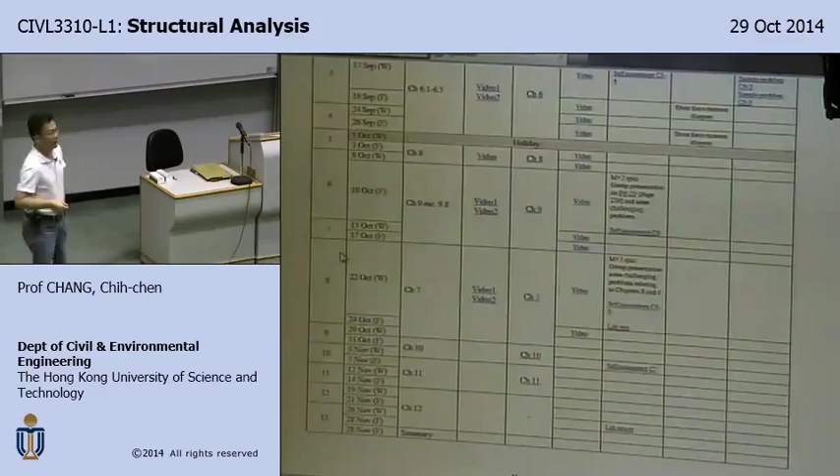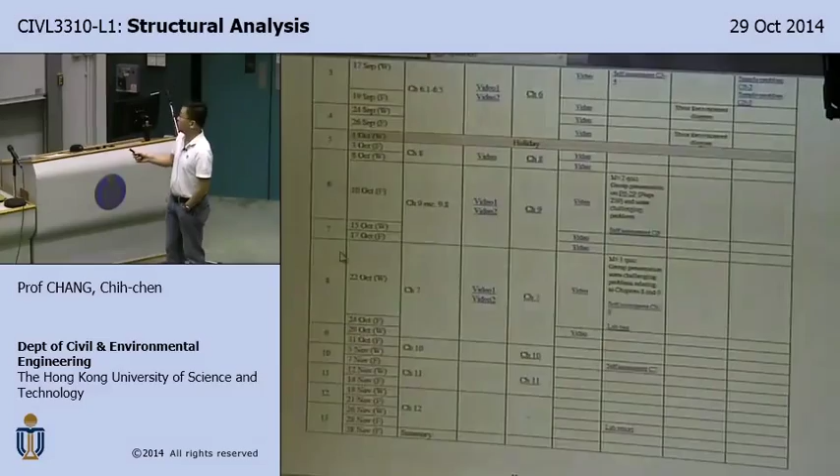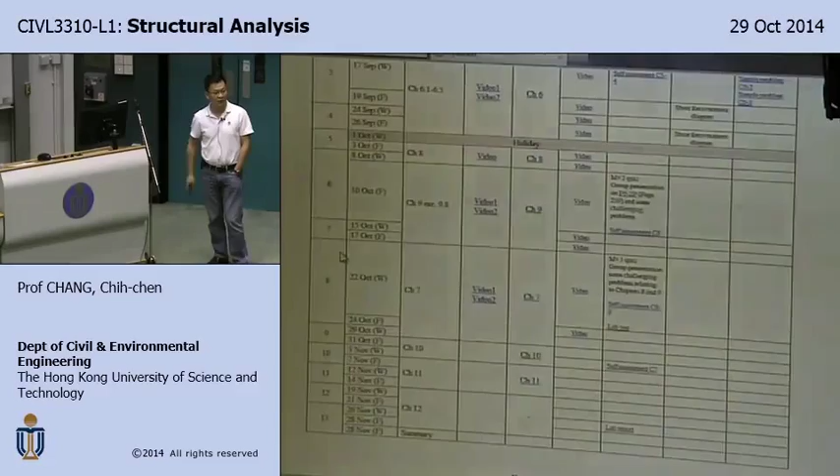Before I start, this is where we are. Today I'm going to finish Chapter 7. We're a bit behind. Also, later on I'll write mainly on the board today, so if you're sitting at the back row, you might want to move forward, otherwise you cannot see my handwriting. Today it's going to be very lengthy calculations and handwriting.

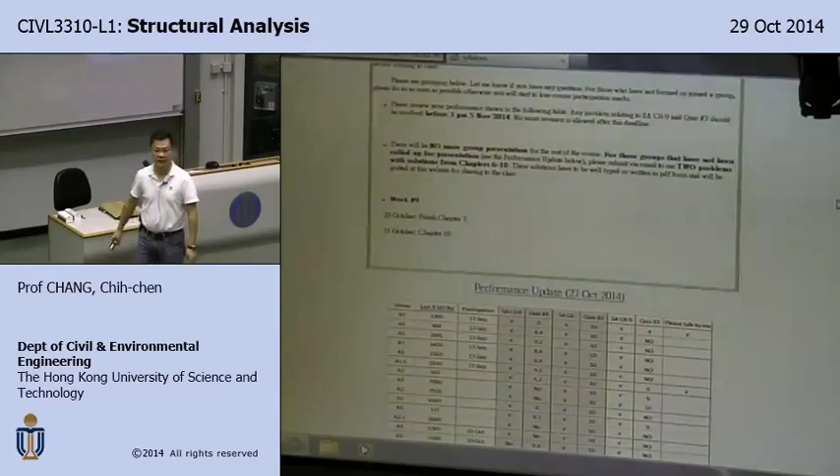With that, let me go back to the board to finish up Chapter 7. Don't forget, Chapter 7 we are talking about approximate solutions.

Approximate solutions - so you'll be expecting to see different answers even for the same problems. And most likely you won't be able to know the accuracy of the solutions you've obtained. So that's the downside of this chapter - we don't know exactly how accurate the solutions are that we've obtained.

But based on experience, it won't be too far apart from your true solutions. By that I mean anything between like 20-30% is kind of acceptable. You know, like in civil engineering design, we have a high safety factor - usually we throw in a safety factor of 2, 2.5, 2.2.

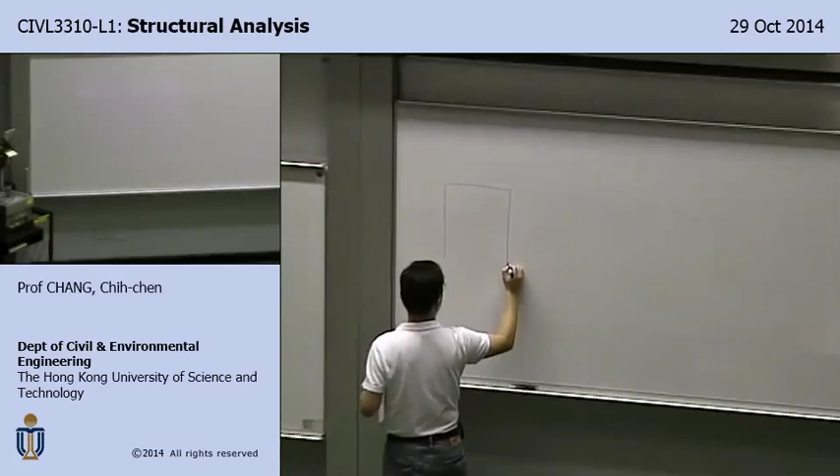So we are talking about two particular methods: one is portal methods, the other is cantilever methods. They start from assuming inflection points. Last time we talked about this particular example, and it so happens that just by using the inflection point assumption, it's already sufficient to give you the answer. So let me put down the solutions for you, and we start from there.

So this is a simple portal frame, 1 bay, 1 story, with horizontal force. Please be reminded, we treat horizontal force and vertical force differently. For horizontal force, we use inflection points, starting by putting an inflection point in the midspan of each component. For this particular example, we don't need any extra assumptions because this is a 3-degree indeterminate structure, so 3 inflection points will provide sufficient conditions already. So the results—last time I showed you how you can get them.

The result is I'm going to split this loading into 2 equally at the base, so it's P/2 shear force, and axial force up, and then bending moment at the base—equal bending moment, PH/4 and PH/4.

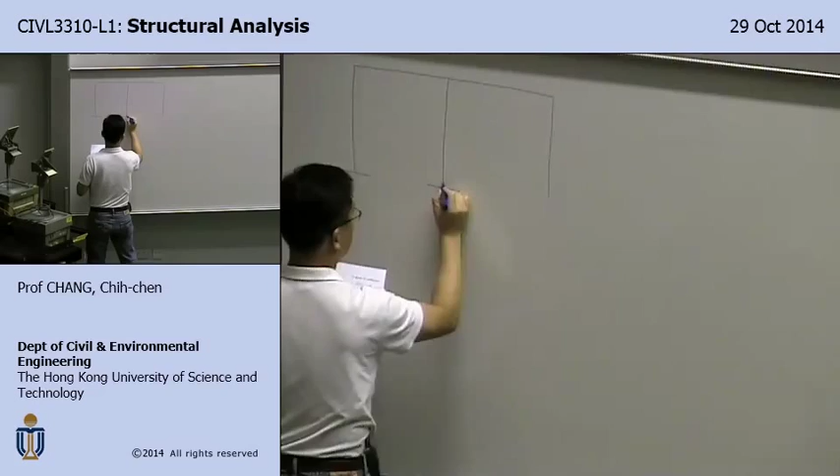Now let's try to take this and expand to a more complicated structure. So let's look at this one and understand what are the extra conditions and what are the Portal methods.

So this is a 2-bay, 1-story structure, assuming I have a P loading. I don't want to give you dimensions because this is only conceptual explanation. So look at the structure, and we identify that this is a 6-degree indeterminate structure—6 degree indeterminacy—so you need 6 conditions. Let's count: I throw in an inflection point at the midspan of each component, that gives me 1, 2, 3, 4, 5. So I'm missing one condition. If I have 6, then the structure will become determinate.

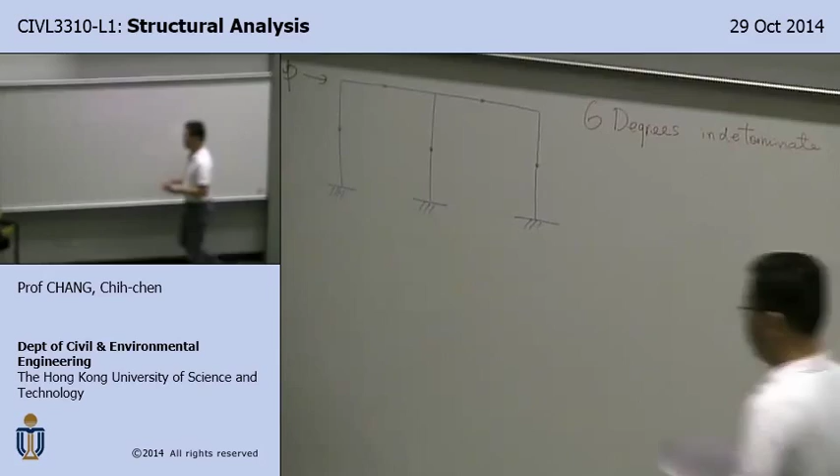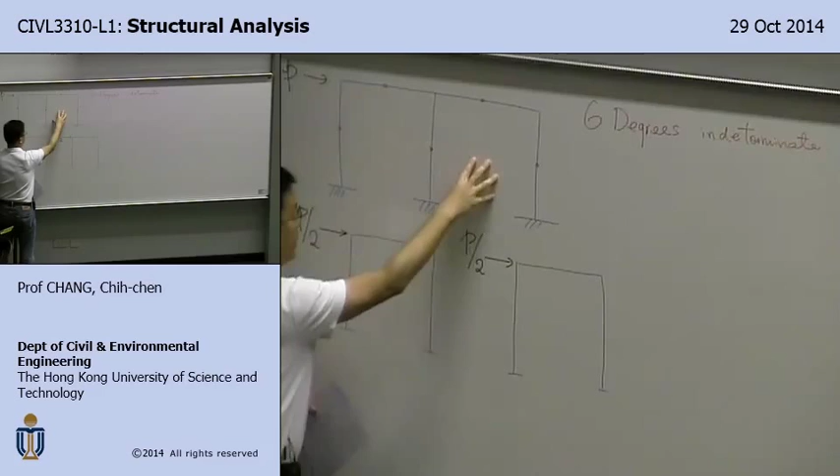So where do I come up with the 6th? Now, if you follow this approach: look, I have 2 bays, so I can just imagine that these 2 bays can be analyzed separately, like this. Each bay takes on equal load, which means this is P over 2, P over 2. So I'm assuming that these 2 bays take on equal resistance of horizontal force. This gives me one extra condition. Together with this assumption and the inflection point assumption, that gives me just enough conditions to analyze this further using equilibriums.

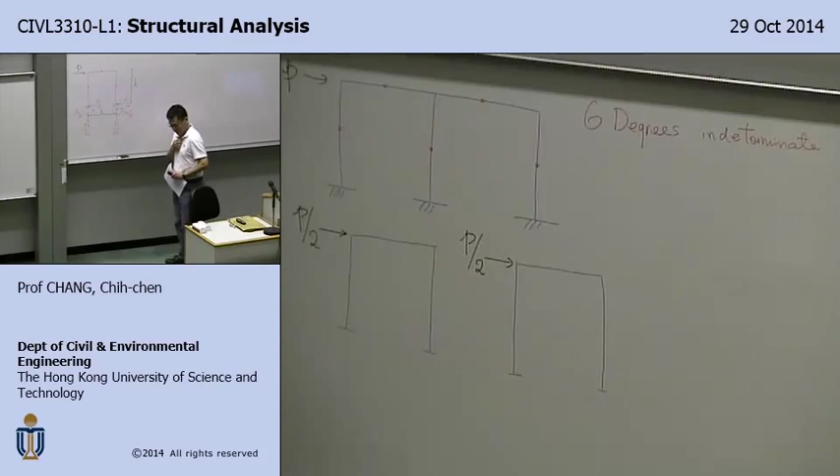So following the previous analysis results, this horizontal force acting on a single bay, 1 story, is going to split equally into the 2 columns—P over 4 on each column. Same thing here, P over 4 and P over 4. This is this column, and this is also this column. This is called the inner column, and these 2 are outer columns.

As a result, the Portal method, if you follow this path—this is called the Portal method—assumes that the inner column, the inside column, takes on 2 times the shear force, while the outer columns only take on 1 time the shear force. So if you follow that, that is called the Portal method.

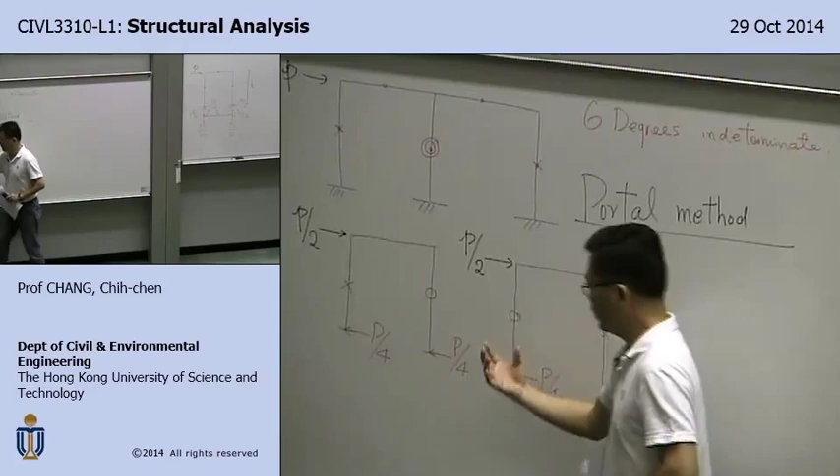So it assumes that each bay of your frame structure takes on equal horizontal force. And the consequence of that is the inner columns will have twice the amount of shear force compared to the outer columns.

Okay, so that works for shorter buildings. Now for taller buildings, this kind of assumption doesn't work too well. So people developed another method called the cantilever method, which assumes some sort of axial force distribution. We'll discuss that after we finish this portal method example.

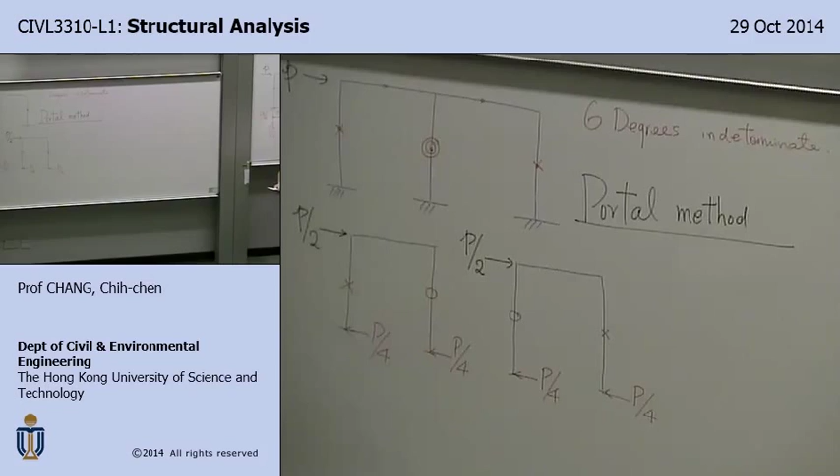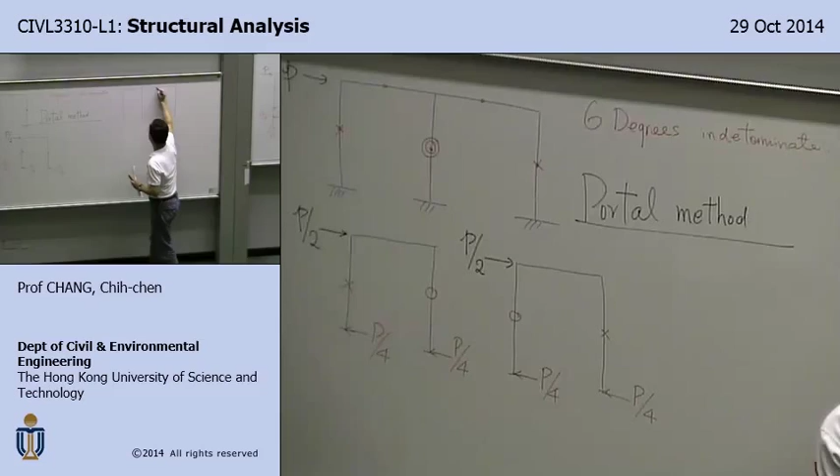All right, so with that, then you will understand why portal methods work. For instance, if I have 3 bays, a 3-bay frame under horizontal force, the shear force here is 1 time, the inner is 2 times the shear force, and the outer is 1 time the shear force.

So basically, there will be 2 additional assumptions involved in producing these results. The assumption goes like this: you split into 3 bays, so each bay resists P1, P2, and P3 force. Together they add up equal to P. So the portal method assumes that P1 equals P2, and P1 also equals P3.

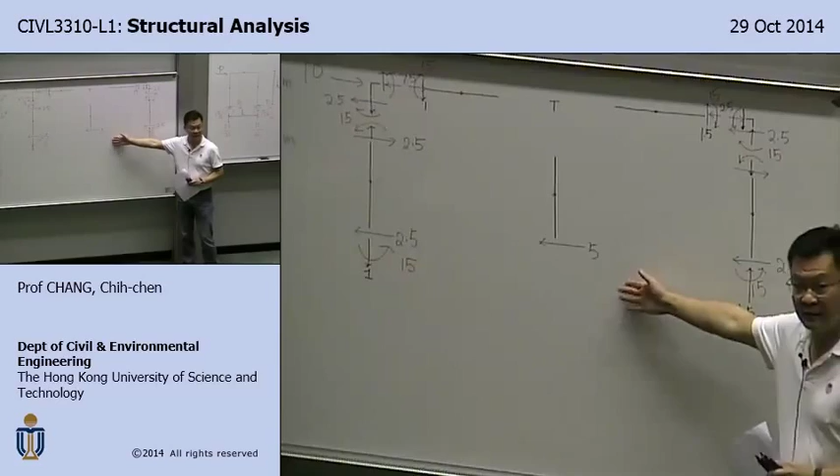Now let's try to resolve the mid part. Okay, everything is about equilibrium, right? Nothing fancy, I just do equilibriums. So look at this component, equilibriums 1, action reactions 1.

Moment equilibriums, action reactions 15. Axial force equilibriums, action reaction 2.5. Good.

Come over to this. Equilibriums 1, action reactions 1. And moment equilibriums, 15.

Axial force, action reactions 2.5. All right, done. The only part is the lower part now.

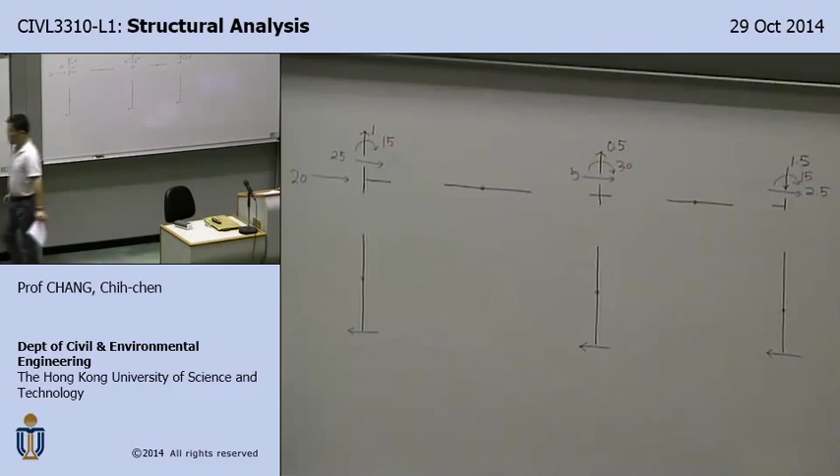So we start from the shear force: 1 time, 2 time, and 1 time. So shear force is here. One time, 2 time, 1 time. So the horizontal force, total horizontal force is 10 plus 20, so 30. 30 split into 1 time, 2 time, 1 time. So it will be equal to 7.5. 15 and 7.5. Okay, we start from there. 7.5, 15, 7.5.

Or you can also look at it this way. There's a 10 and 20, and then you cut a free body diagram at the bottom of the column. 1 time, 2 time, 1 time, to compensate total of 30, so this will be 7.5, 15, 7.5. Good? Are we good? You want to do it for me? Yeah, you're okay.

All right, so let's go. The height, half of 16 is 8. 7.5 times 8. 60.

Oh, I should work out the shear force first. Equilibriums, action reactions. This is 7.5. So 22.5 minus 7.5, so there should be 15. Action reactions, 15.

So I'm working on the blue first. Now work on the red. Here, moment equilibriums. There, moment equilibriums. Action reactions, 60. And then work at this joint, 60, 15. So 75 action reactions, 75.

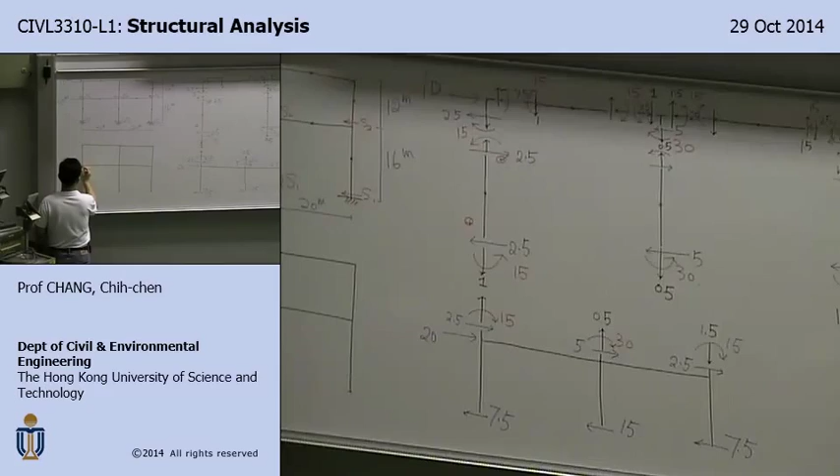So 15, 15. There's an inflection point in the middle. Look at this. This is tensile, and this is tensile, 30, 30. Inflection point in the middle.

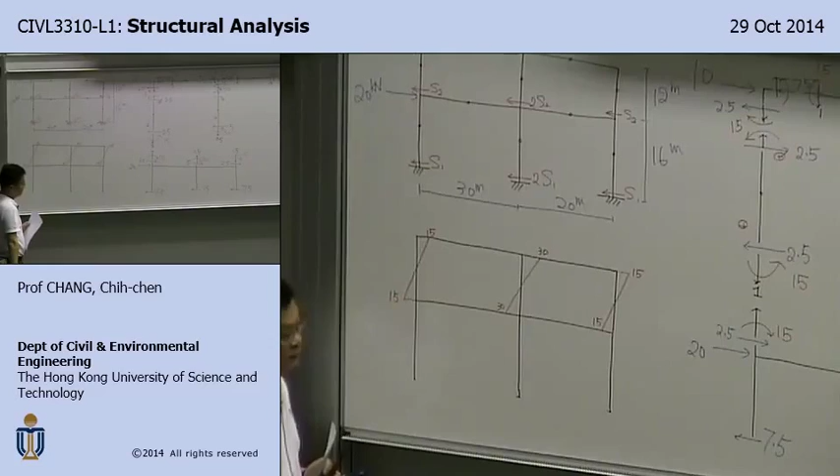And this one, tensile side, 15. All right, that's tensile side moment distributions. Look at the top.

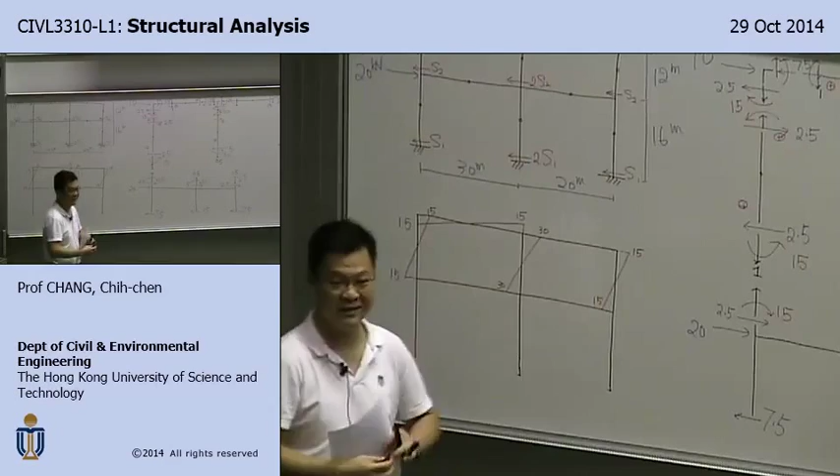So this is the tensile side. Here is a tensile side. So 15, 15. I'm writing a smaller and smaller font size, it's too complicated. So tensile side, 15, 15.

Okay, that's the top. Next is the bottom. So again, tensile, tensile, tensile. All right, got it. So column there, 60, 60.

And then 120. So, 120, 60 again.

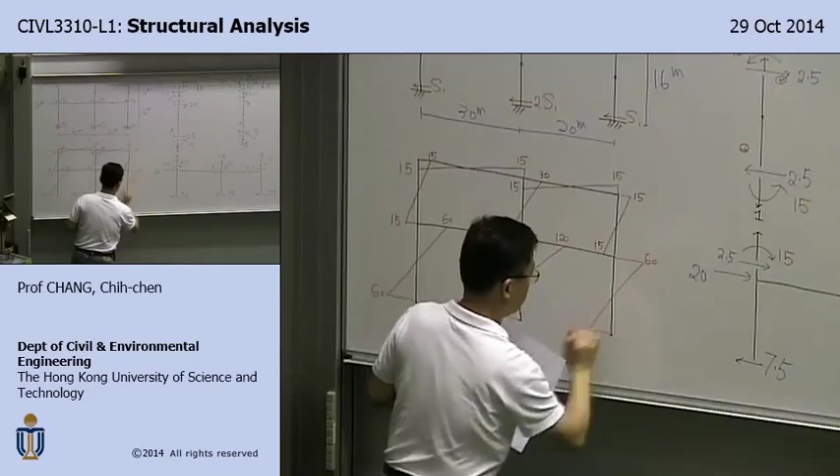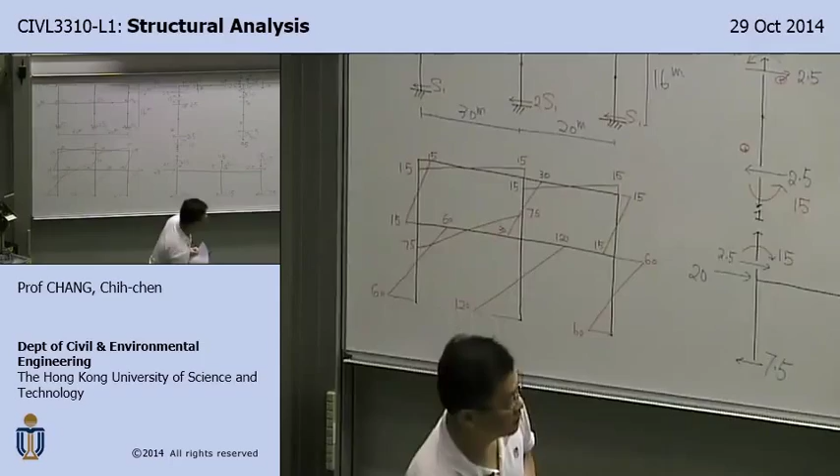Okay, that's column, and then I have beams. Beams will be 75, 75. Seven five, 75. Okay, done. This is the moment distributions plotted at the tensile sides.

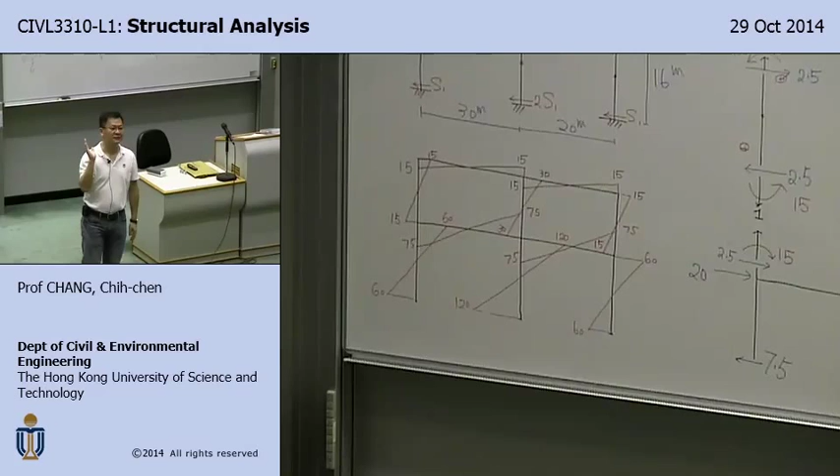Let me just remind you again that these are approximate solutions. And as you can see, if I work this out using cantilever method, the solution is going to be different. And the differences are not small. So please be reminded that this is the price that you have to pay.

Basically, this is an indeterminate structure, so we are trying to analyze this using determinate means. That's why you end up with a conclusion like this. And as I say that, I won't be surprised to see the difference ranging between 20, 30, even 40% between the two sets of solutions.

OK, so that's the portal method. Next, I'm going to go very quickly on the cantilever method. I'm going to use the same example, but using the cantilever approach.

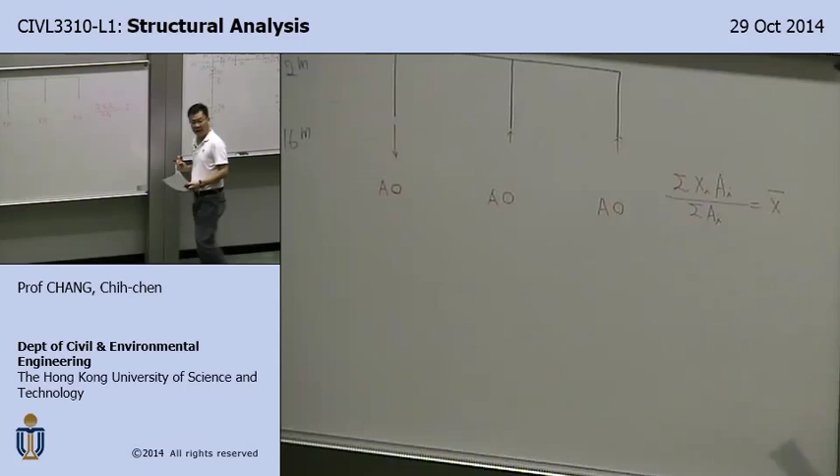In statics, we have centroid calculations. Remember that? Summation xi ai over summation ai gives you the average location. That average location refers to the centroid location.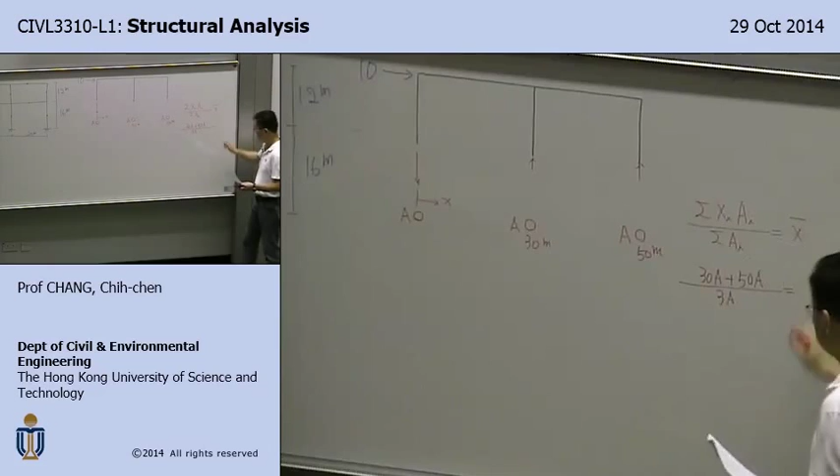So you set up a coordinate system here, called x. This area is located at 30 meters, and this is located at 50 meters. So summation xi ai is 0 times a, 30 times a, 50 times a, divided by 3a. That gives you the number 26.67. So it's telling you that you have a centroid at this location, which is 26.67 meters away from the origin of x.

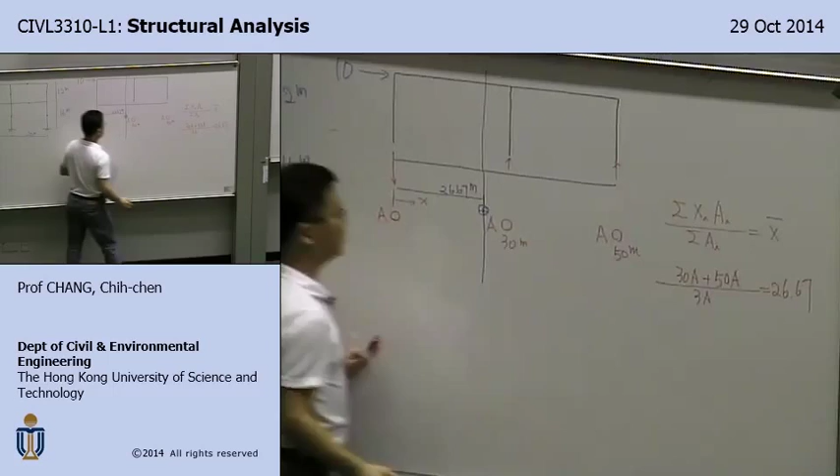For the cantilever method, it assumes that the axial force is linearly distributed with respect to the centroid. Here's the centroid location, and it assumes that the magnitude of the axial force follows a linear distribution. So this force, that force, and that force are linear with respect to the centroid.

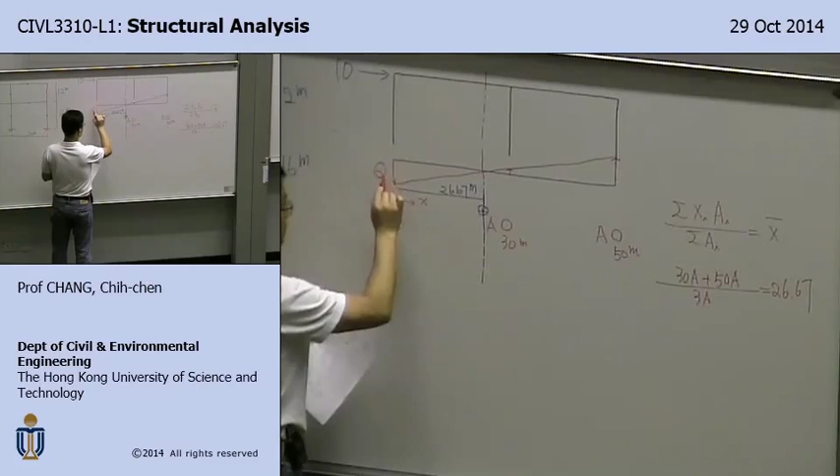If I assume this force is Q, because I know the geometry and the locations, I know this is going to be 0.125 Q upward, and this is going to be 0.875 Q.

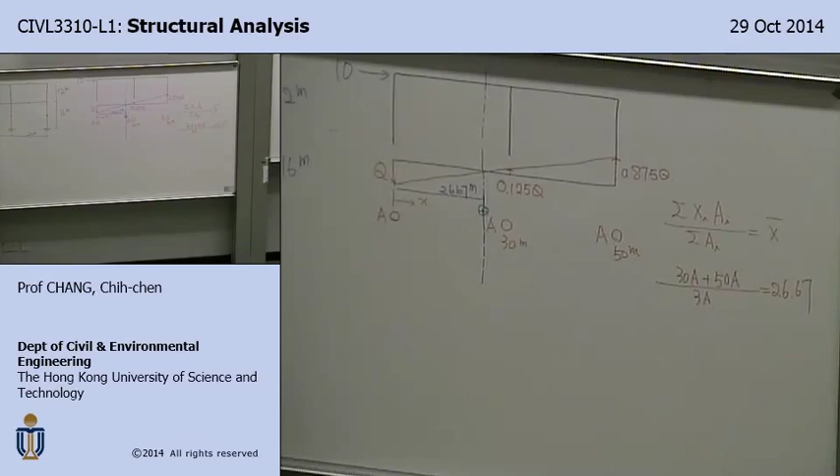So I'm just explaining the assumptions adopted by the cantilever method. Instead of saying that shear force follows some distribution, it assumes that the axial force follows this linear distribution with respect to the centroid of the cross sections of the columns. That's the tricky part. But it turns out this method works better on tall buildings. If you want to analyze like a 100-story frame, most likely you need to use this method, which is more accurate than the Portal method.

All right, so if you understand that, then this is what we can do. We can crack the structure from here. So let's cut it over there.

Here is a 10 kilonewton force. The axial force follows these distributions: this is Q, 0.125 Q, 0.875 Q. Of course there's an axial force, there's a shear force, no bending moments. This is the hinge location, the inflection point location, so there will be no bending moments, but there will be shear force and axial force.

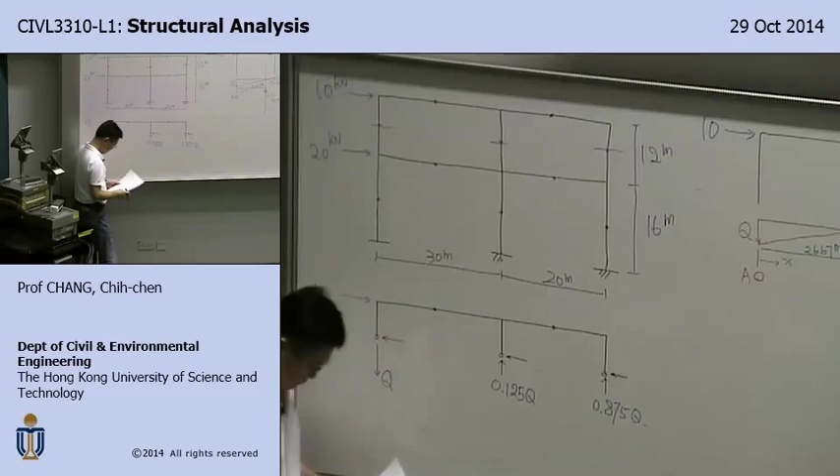What you can do is come over here, or come over there, it doesn't matter. Just take moment equilibrium. You come over here, take moment equilibrium, and you find out the only unknown is Q. Moment equilibrium, summation M, that will give you the Q value.

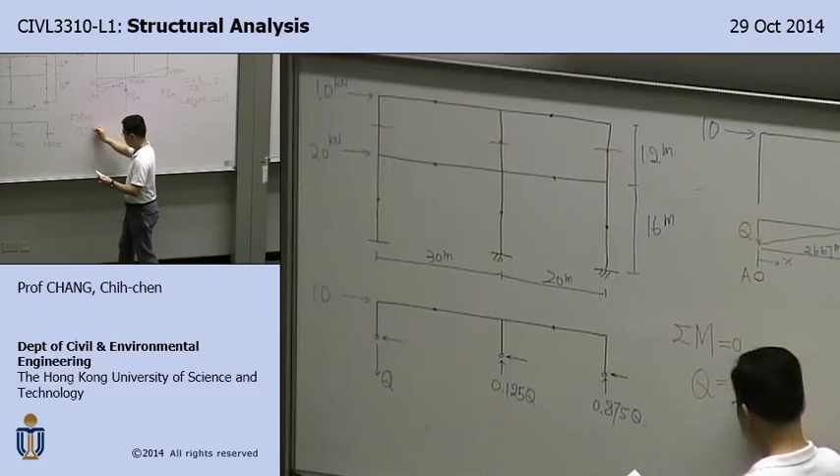Remember that you have to do it at the inflection point where you don't have bending moment. You cannot do it here because there will be bending moments. So you can only do it here, here, here.

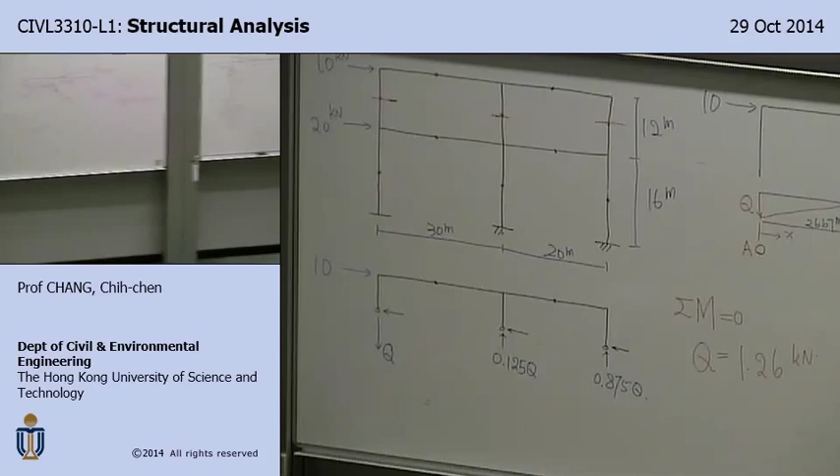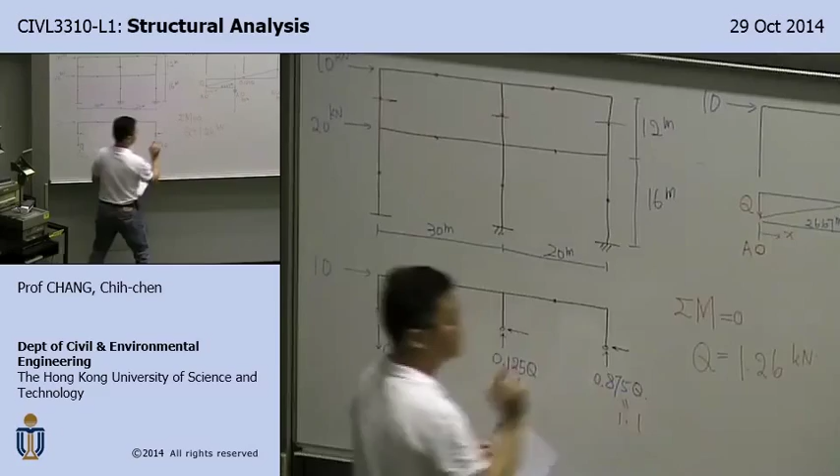All right, so with that, then your solutions can start. This then is 1.26. This is 0.16, 1.1. All right, so then we can start our solutions.

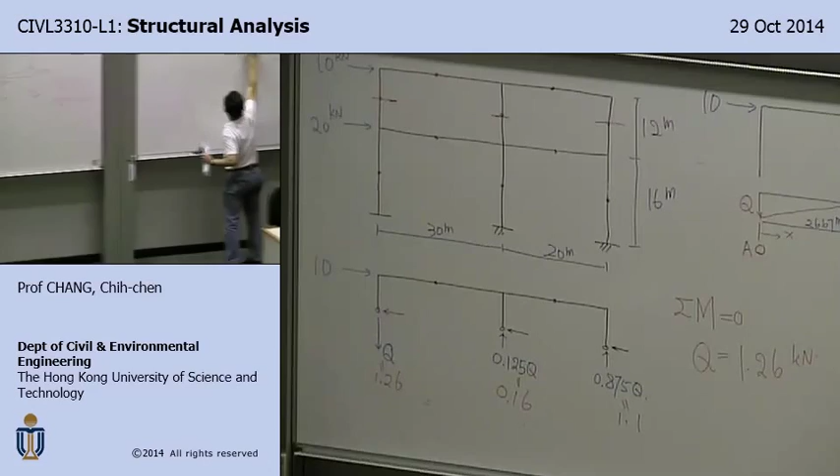We'll do it quick. The calculations after you get the axial force are very similar to the Portal method.

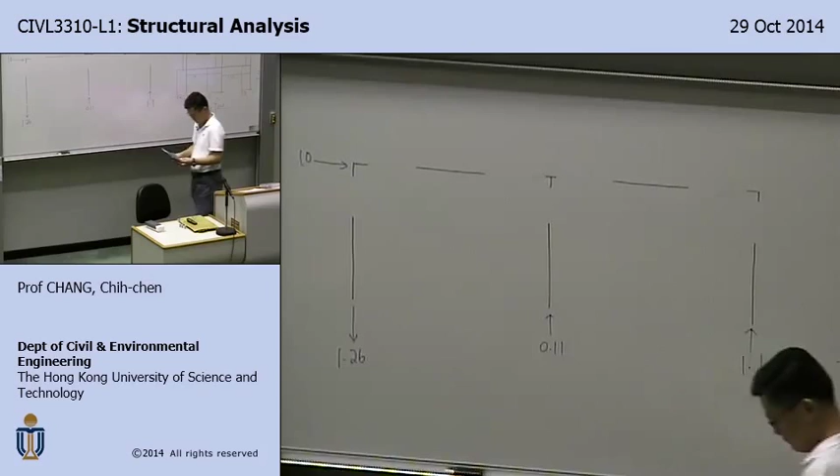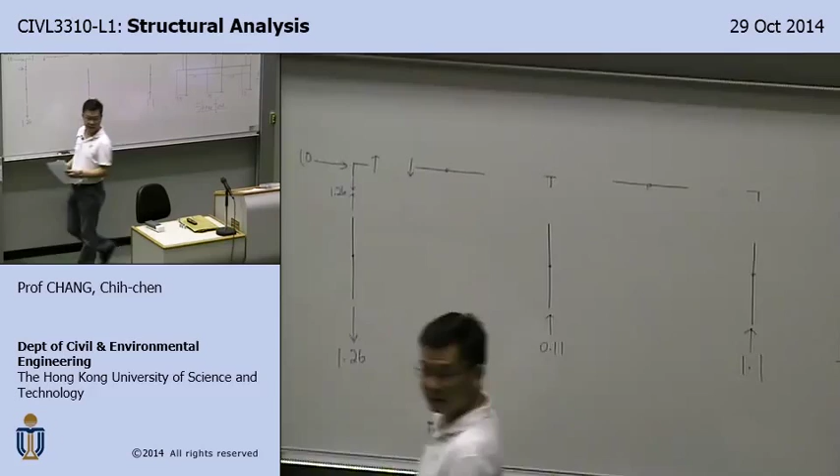You want to see the magic again? Let me show you just one third of it. Let's put down the inflection point. Trust me, right? Follow the color: 1.26, 1.26, 1.26, 1.26, 1.26. You see? One number leads all the way there. So that's 1.26.

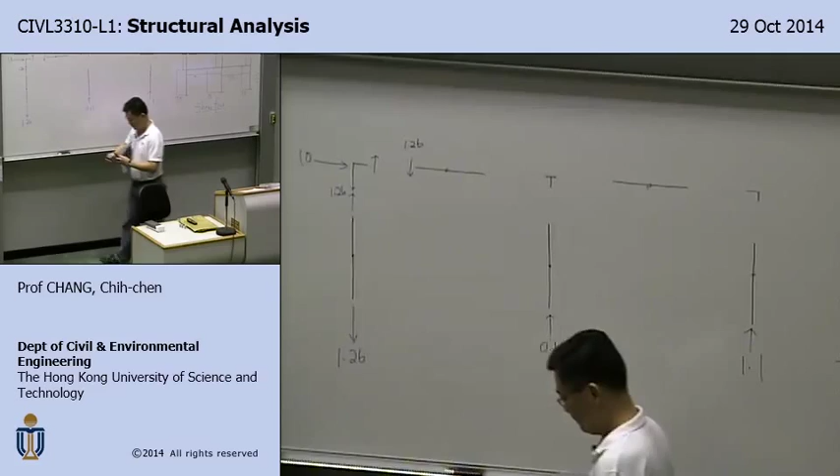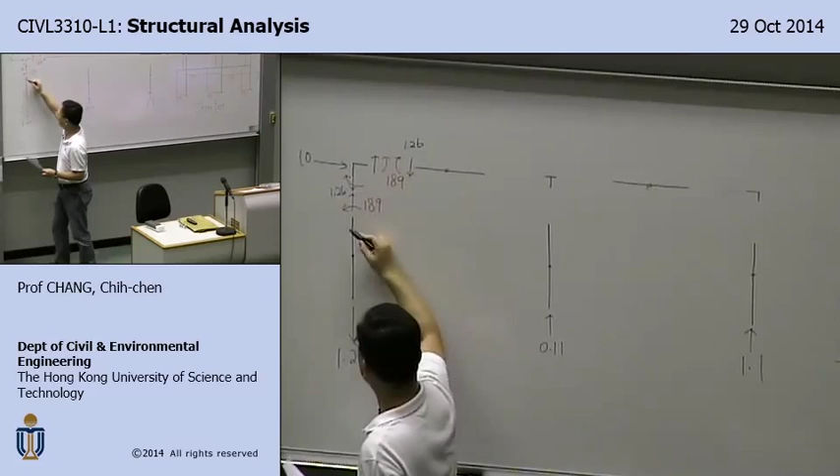Moment equilibrium, 18.9. Joint equilibrium, 18.9, action reactions. Moment equilibrium, action reaction, moment equilibrium. Isn't that nice?

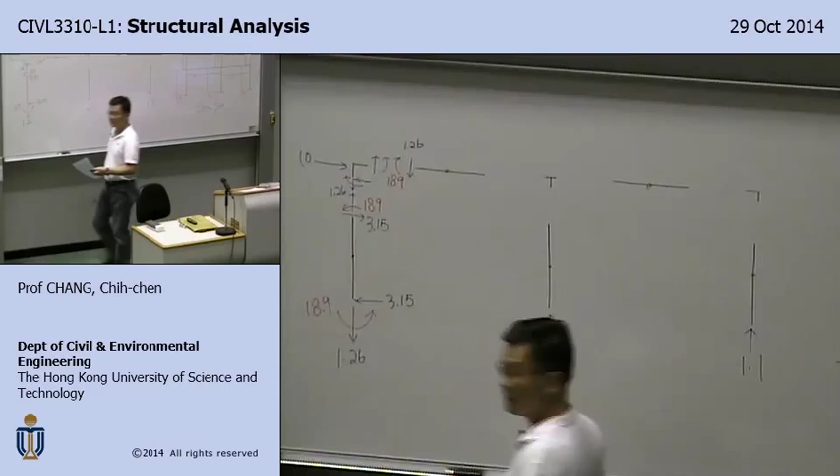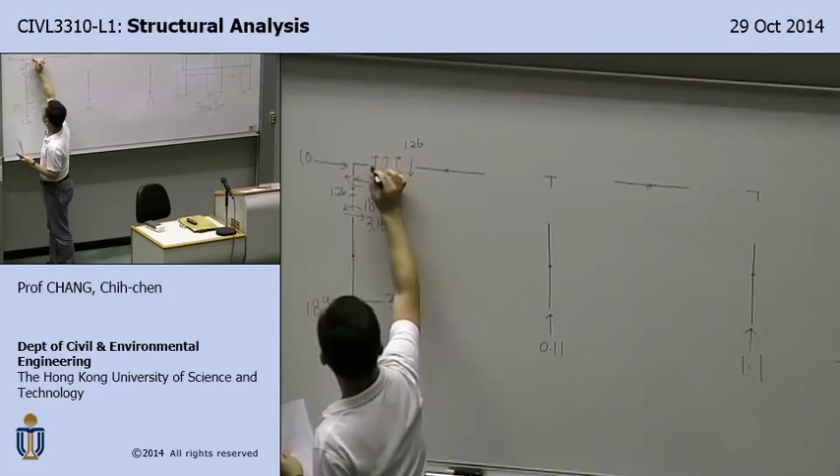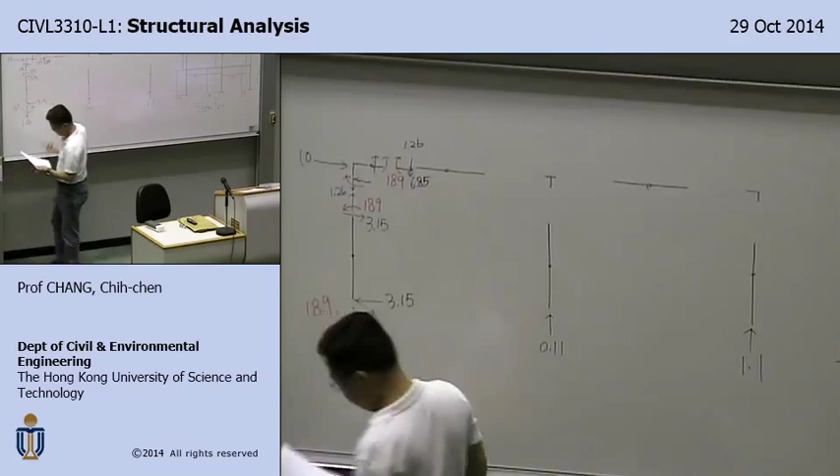I'm missing something here: 3.15, 3.15. 3.15 balances with 10, so that is 6.85. I ran out of space, 6.85 there. So I start with one number, look how I can get the rest, I start from one number.

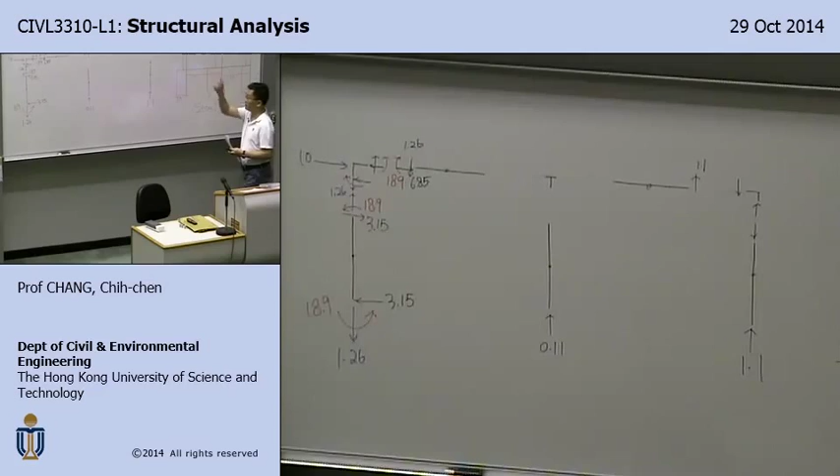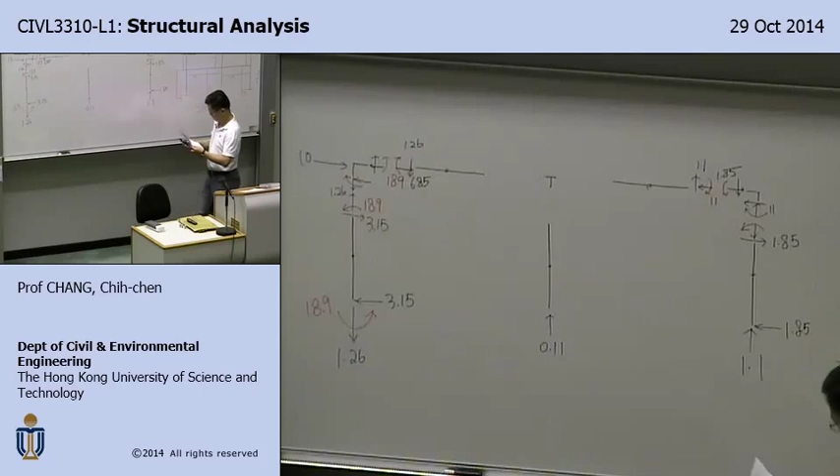Here again for you, follow the color: 1.1, 1.1, 1.1, and 1.1. Now follow the red: moment equilibrium, action reactions, joint equilibrium, action reactions, shear force, equilibrium, and moment equilibrium. All right, done.

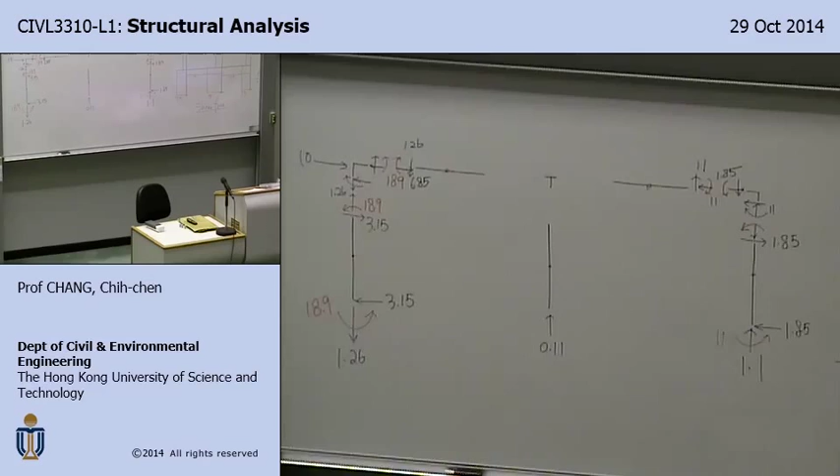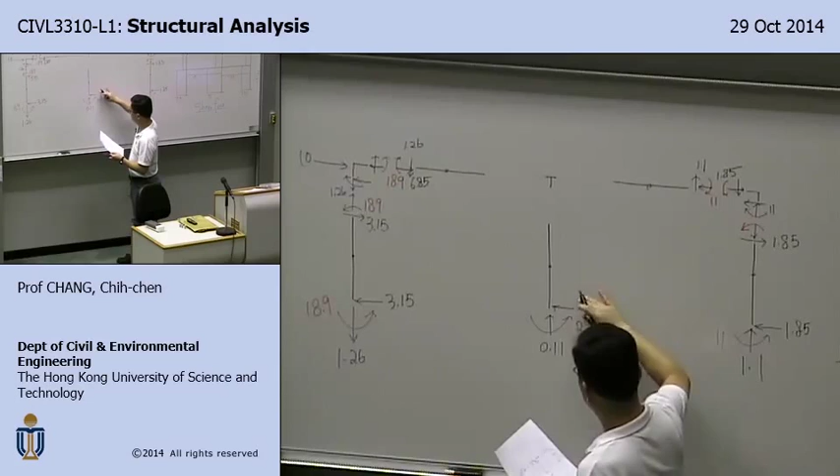So you can fill in the gap now. Let me show you some numbers here. So I know this is complicated, but let me post the solutions to the website so that you can double check. How's that?

All right, so you can then compare the solutions of these two approaches. Okay, that's the end. Good luck on your exam.